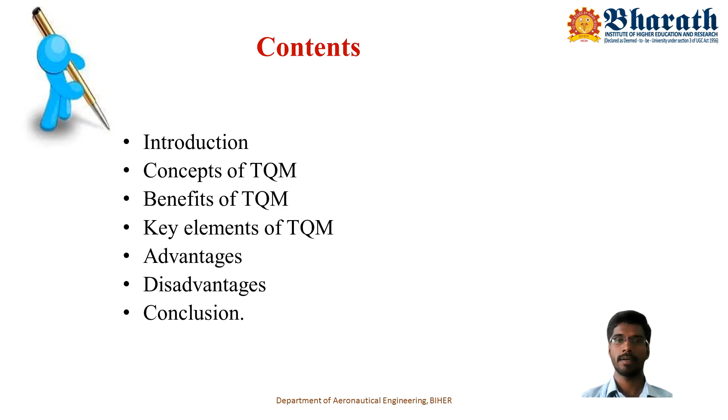First, we'll start with the introduction. If you take total quality management, it is a sentence consisting of three words: total, quality, and management. So what is meant by total? It is made up of the whole, made up of whole, everything we can tell. Next thing is quality.

What is meant by quality? In two terms we can define quality: one in the product, another in the service. So, degree of excellence in a product or service. How much quality we are getting in a product or how much quality we are getting in a service, in terms of degree we have to tell.

Then the third word is management. It is the act, art, or manner of planning, controlling, and directing. This is called management. So now we can tell total quality management is the art of managing the whole to achieve excellence.

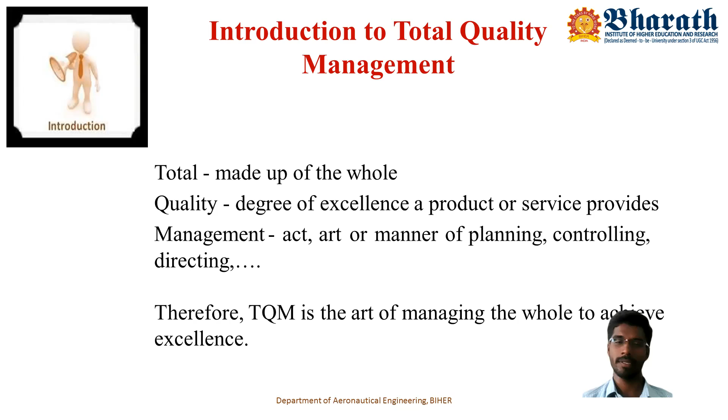Now we will move on to the concept of total quality management. Why do we have to go for total quality management? To produce the quality product the first time. During the first time of manufacturing or during the first time of service, we have to provide quality products. We should not go for second time manufacturing or produce some error product. While making it the first time, the product should come with 100% perfectness. That is called quality.

How can we achieve quality the first time itself? By implementing the TQM concept. For that, we are having a number of TQM tools, which we will discuss in the upcoming lectures. So this is the main concept of TQM.

The second point is we have to focus on the customer. Why? As I told in the previous slide, we are providing quality in the product as well as the service. Who is getting the product or the service? The customer. The customer may be whoever - the person getting the mobile, the person getting the service, the person buying the bikes, all are the customer. So that time we have to focus on the customer, because the customer is the one purchasing or getting the service. So our focus should be on the customer.

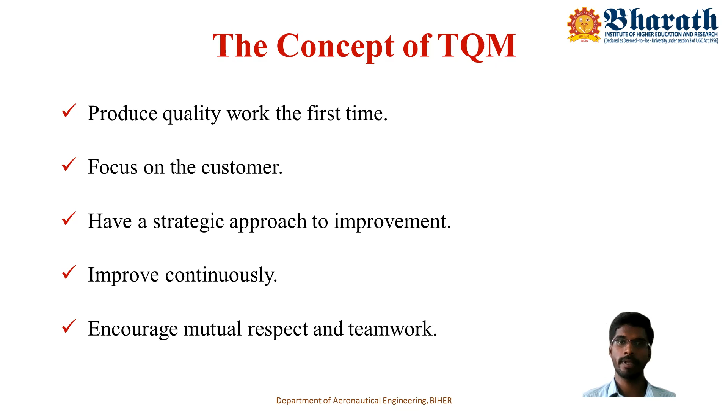Now we will go for the various definitions of TQM. We can list n number of definitions for TQM. Here I will tell some basic 3 definitions.

The first definition: it is an organizational effort designed to improve quality at every level. So in the sense, it is an organizational approach for improving the quality, at every stage of the product or every stage of the manufacturing. Here the word 'every level' is mentioned. What does that mean? If you're manufacturing any product, at a single level we can't get a complete product. A product is a collection of more than 2 or 3 parts.

So 2 or 3 parts are manufactured at different levels. That time also we have to check about the quality. After we get a product from the parts, that time also we have to check the quality of the product. So this is the meaning: organizational effort designed to improve quality at part level as well as product level.

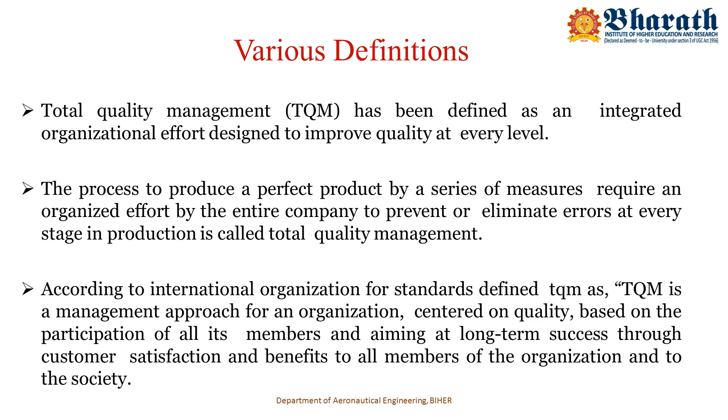Move on to the aspects of TQM. There are three aspects: one is counting, second is customers, third is culture. In the first aspect, we will be studying the various quality tools. We have various tools and techniques for analyzing, understanding, and solving quality problems.

So in the sense, if you are getting a failure in a product, there might be a reason why the failure occurred. If the failure happened because of the customer, or because of the tools, or because of the raw material, those things we have to analyze and understand. For that only, we should focus on tools, techniques as well as trainings.

Then the second aspect, this is the key aspect of total quality management: customers. While giving the definition also, I told we have to focus on the customer. Why? Because the customer is the beneficiary.

Quality for the customers is a driving force and central concern. Without the customer, even if you are giving 150% quality product, there is no use.

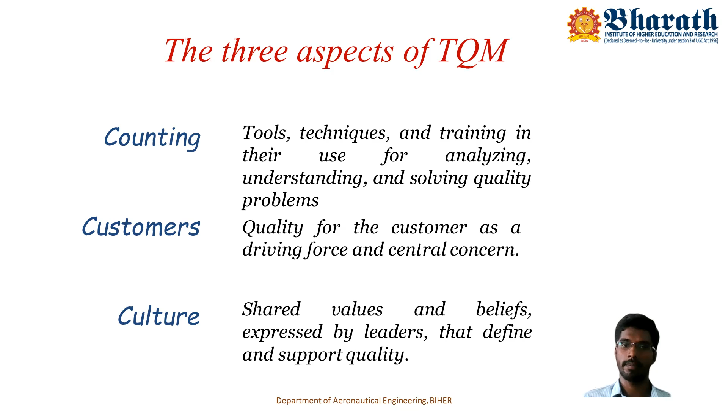The last aspect is the culture, how we are sharing the values as well as beliefs by the leaders that define and support quality. So these are the various aspects of total quality management.

Now we will go for the principles of TQM. This is the first principle: we can produce quality work the first time as well as every time. Here we should not speak about failure or defects, because we implemented the total quality concept. You can approach the total quality management concept using any tools, any techniques. Once implemented, whether it's the first time or repeated or every time, you should get quality product or quality work. That is the main principle.

Then second thing, always everywhere customer - we have to focus on the customer. Then we have to go for the strategic approach for improvement. What improvement? Quality improvement. And then there should be continuous improvement.

Why am I telling there should be continuous improvement? Once you did some corrections - let us imagine you got your own product, and for measuring the quality of that product, there is some 0.2% error. For reducing that 0.2% error, we have to implement a strategic approach. After implementing the strategic approach, we should again measure the quality to see whether we got any improvement in that 0.2% error or not. Definitely there should be some improvement. So that is the meaning of implementing the strategic approach as well as continuous improvement in quality.

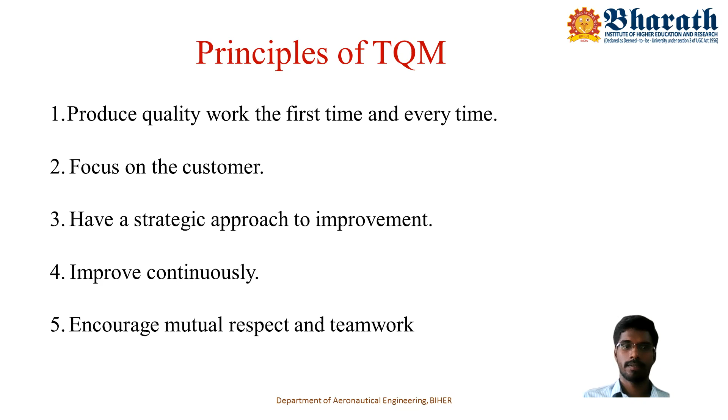Then next thing is the key elements of TQM. So what are the key elements? First I will tell you the various key elements, and in the upcoming slides I will explain in detail. First key element, focus on the customer. Second key element, employee involvement. And the third key element is continuous improvement.

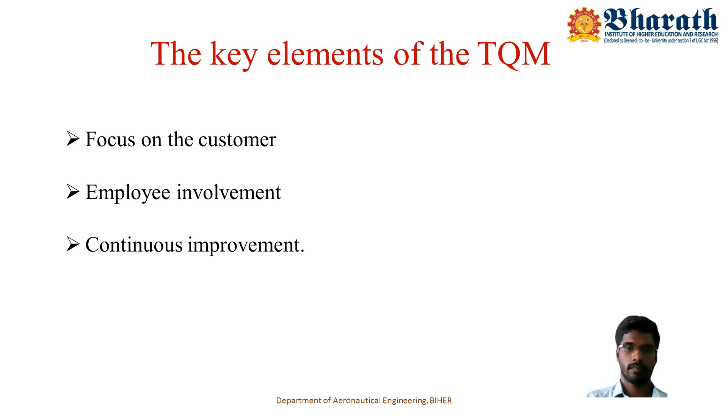You see, first key element, focus on the customer. So why do we have to focus on the customer? This is what I told in the beginning - because the customer, the end user, is getting the product or getting the service. That's when we have to focus on the customer.

So for that I will tell you a simple example. Let us imagine you are going to launch a new product, either mobile or laptop or whatever. Before launching the product, you have to focus on the customer who will buy this product - whether 18 plus will buy this product, or 15 plus, or above 50 plus age people will buy this product. Like this, we have to take the survey, and based on the survey we have to produce our product.

Just saying 'okay, I have an idea, I have the concept, I have the machine, I'm going to produce a product like that' - just like that we should not take action, we should not produce the product. We should identify the customer according to the customer requirements. After identifying the customer, you have to approach the customer.

Okay, what are you expecting, what features do you want added to the existing product? What quality ranges are you expecting? Like that, we have to identify the customer expectation and customer requirements. Then only we should go for releasing the product.

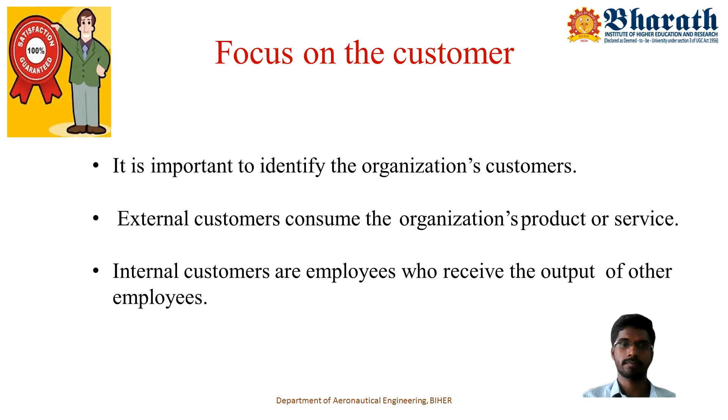Then the second key element is employee involvement.

What is meant by employee involvement? Why should there be employee involvement? If you want to get a quality product, as a single person, no one can achieve complete quality. So in an organization, if 100 people are working, there should be a contribution of all 100 employees.

If only one employee is working with some effort or some concept or technique, there is no possibility of getting 100% complete quality product. So the remaining 99 people should also work together for getting a quality product. That is the meaning of employee involvement—employees should be involved in quality initiatives.

In any organization or firm, there will be two types of employees: frontline employee and backline employee. In simple understanding, if you are working in a production line as the production engineer, below you there will be some workers or machine operators, and you should have contact with them.

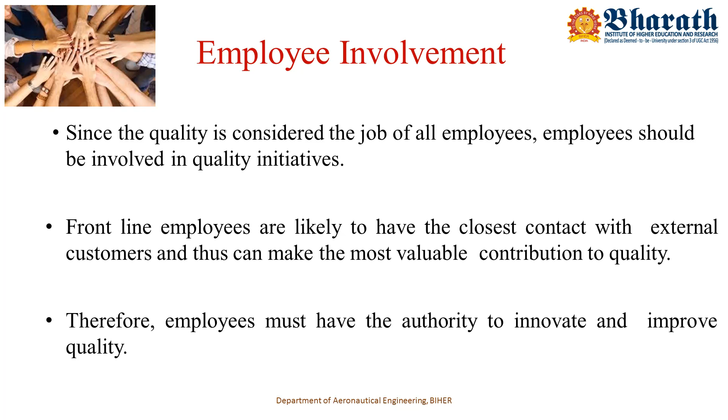So the key element is continuous improvement. Why should we know about continuous improvement? What is the meaning—if I improved the quality of the product just one time, why do I have to go for continuous improvement again and again? If you take the word quality, it is not ending with a single process.

So for that only, we have to go for continuous improvement. If we work continuously, there will be improvement in performance, improvement in speed, and improvement in the features of the product as well as the service. To get improvement in these parameters, we should go for continuous improvement.

Continuous improvement doesn't mean you can imagine, 'I'm doing continuous improvement, I got some large amount of quality'—it's not like that. The incremental improvement that occurs on a regular basis will eventually add up to vast improvement in quality. Even if it's a small add up each time, there will be a vast improvement. That's why we should focus on continuous improvement.

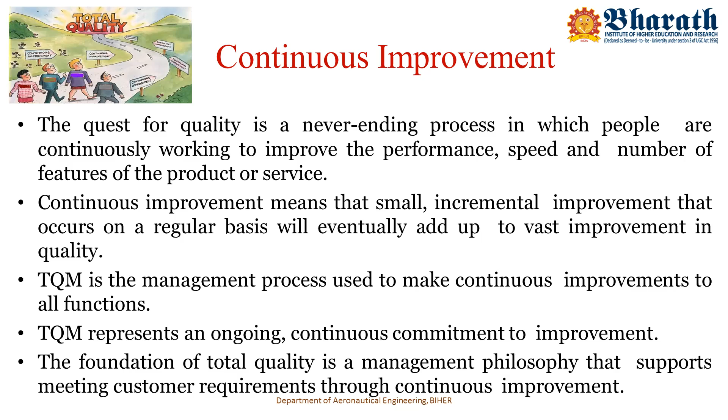We'll go for the benefits of TQM. Okay, I implemented the TQM approach, I implemented the TQM concepts. What will be the benefits? Once you implemented the TQM tools or TQM concepts,

definitely there will be improvement in the quality. You can't say, okay, I implemented all the 7 quality tools, but I didn't get any improvement in the quality. You can't say that. Why? Because all the employees are working together, all the employees are implementing some concept, they're implementing some tools. Then definitely the output will be a finished good product with 0 defects or 0 failure.

Then once you implement the TQM, definitely there will be employee participation. You can't think, okay, only one employee is working, remaining all are at rest. We can't think like that. Definitely there will be all the employee participation, and all the employees will work together. We can call it teamwork.

Once they are working in a team, definitely there will be a better relationship among the employees, and our customer will be satisfied with our product. Our customer will be satisfied with our service. So we can call it customer satisfaction and employee satisfaction.

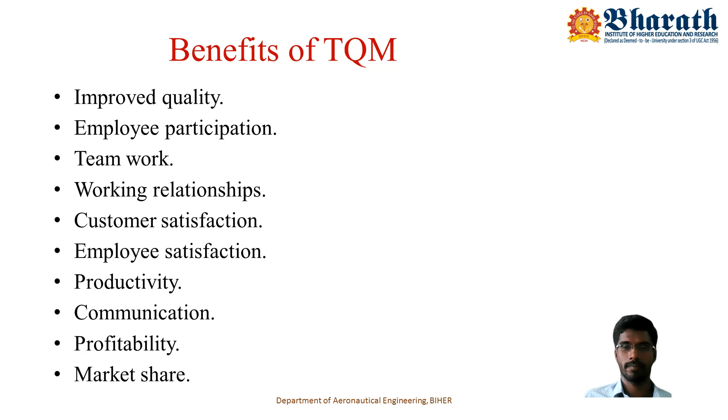Now we will move on to the advantages of TQM.

So whenever you are producing a high standard product or high quality product, definitely there will be an improvement in reputation. How does the reputation improve? We are identifying the faults, we are sorting out the problems, we are giving the product with 0 defects. So this is the main advantage, it improves the reputation. Faults and problems are spotted and sorted out quickly.

Then high employee morale, which in the sense that workers will be motivated by extra responsibility, teamwork, and involvement in decisions of TQM.

This is another advantage. And cost, we have to mainly focus on the cost. When you are giving the high quality product, at that time you should think about the cost. Okay, I want to give a high quality product, for that I am ready to spend more money - it is useless. You should spend less amount, but you should get high profit as well as high customer satisfaction. So these things we can achieve by implementing the total quality management concept as well as total quality management tools.

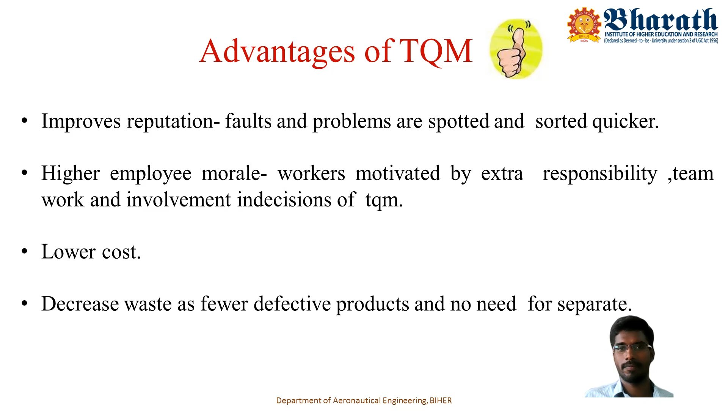Next, drawbacks of TQM.

So in the previous slide, I told you there is less cost, but at the initial stage, we have to spend some amount as the initial introduction cost. That will come into picture. And then once you implement the TQM concept, you can't assume, okay, for several years or for long years I will get the benefits like that. We can't think that way. And then workers may be resistant to the change. So these are the various disadvantages of TQM.

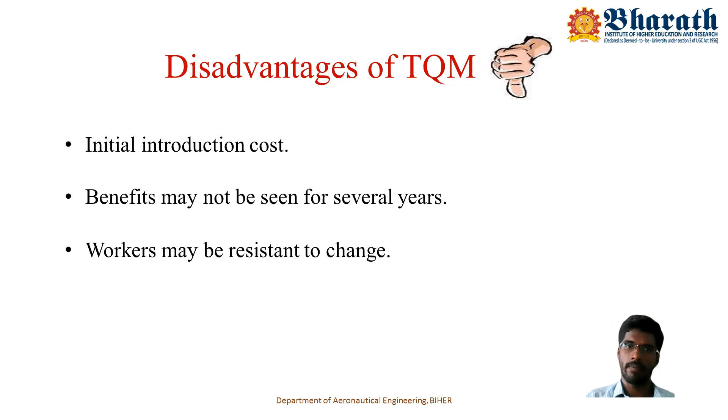Next, we will move on to the benefits of total quality management. The first benefit is the financial benefits. Financial benefits in the sense it will include lower cost, high return on sales, and high investment. And then you can charge higher prices compared with other competitive products.

Why? Because you are giving high quality products. That time definitely your product price will be high when compared with the competitive products. So no one will ask, okay, I am giving the same kind of product, but my MRP is this much, why you are giving this much MRP?

No one can ask that question because you are giving high standard, high quality products. How can we achieve these things? Because of the TQM. And this TQM will improve access to global markets, high customer retention levels. Long time, the customer will rely on your product only. They won't go for other products.

For example, we are buying a cloth or shoe with some high brand. Brand in the sense which is having high quality. We believe, right? Some brand you are buying. How are we buying? Which is satisfying your requirement, which is satisfying your expectation. That's why you are relying on that particular brand. You are not moving to any other products. So if you are giving a quality product, the customer will be relying on your product. You will get high customer retention levels.

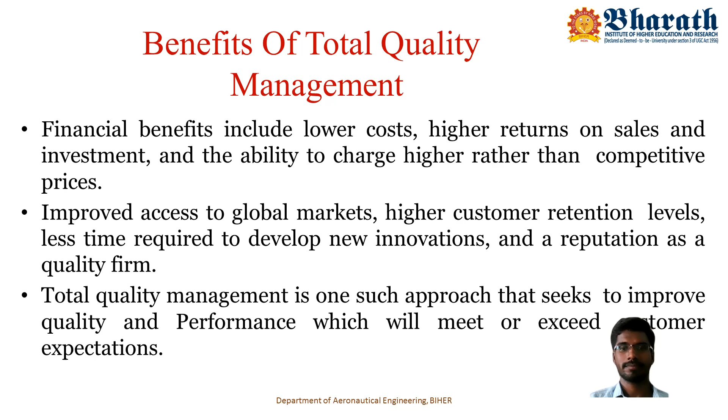And finally, the conclusion we came to. So TQM encourages participation amongst the employees, managers, and organization as a whole. They know they want to work, okay, this is my work, this is my team, or this is my product, I only do this. Like that, they won't segregate or separate. As a whole, they will work together.

It is nothing but teamwork. So using quality management reduces rework. Once you implement quality, while giving the product the first time or every time, you will get quality products only. You won't get failure products. That is the meaning. It will reduce the rework to nearly zero.

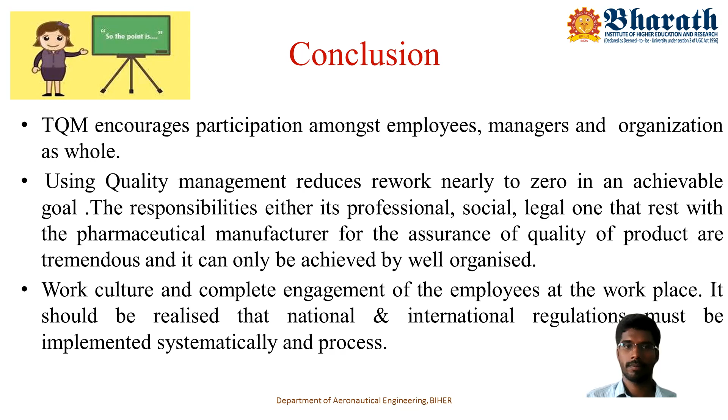Then in the TQM, I told it is a continuous improvement, and there also should be control. That control should be practiced rigorously. We can't just do some modification or some changes for quality improvement casually. There should be rigorous practice and control.

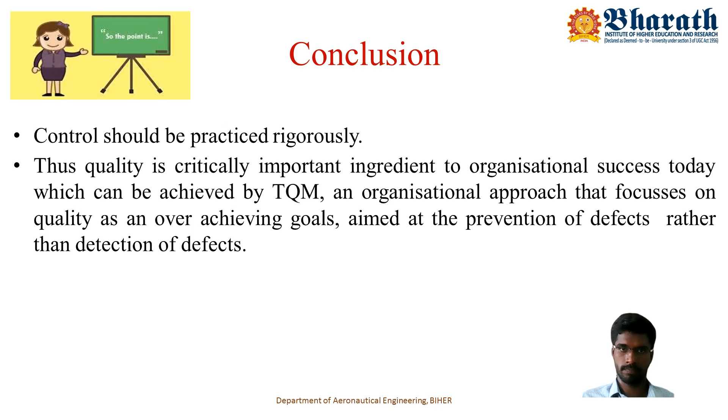And the last conclusion is quality is a critically important ingredient to any organization's success today, which can be achieved by TQM. So finally, I want to conclude this: if you want to get quality product or quality service, it is a critical ingredient which can be achieved by TQM. So why we should go for TQM? To prevent failures rather than detecting the failures. Clear? With this, I will close my today's lecture.